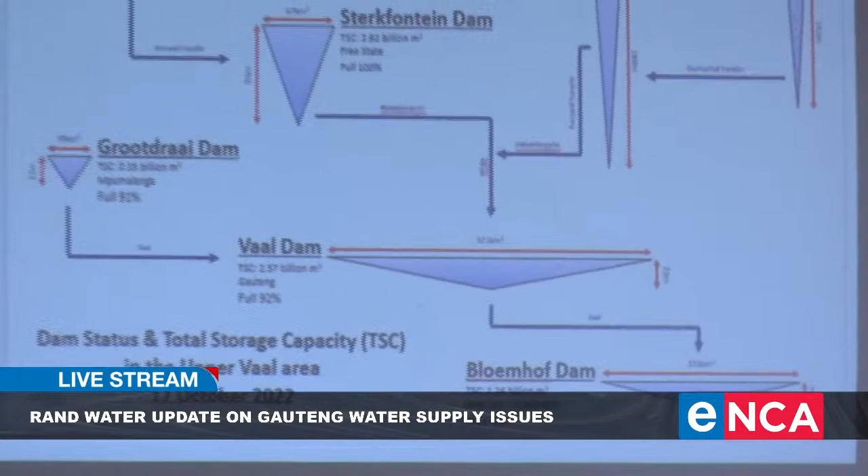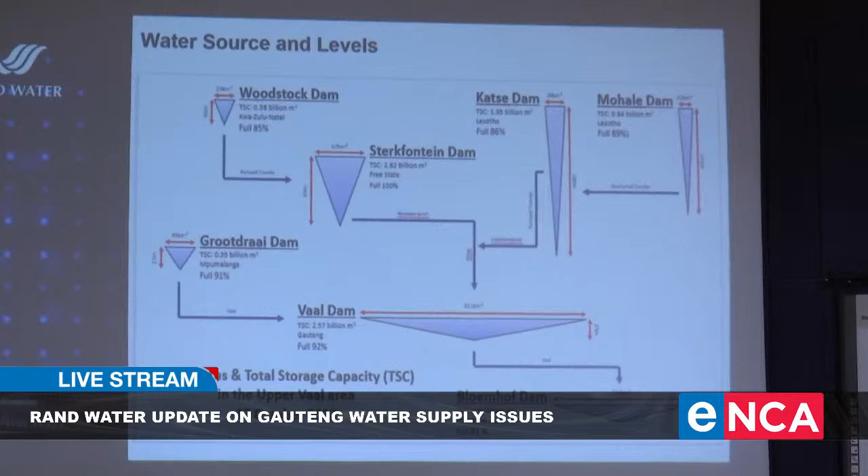Ladies and gentlemen, by and large, all the water that the people of Gauteng consume comes from Lesotho. South Africa does not have sufficient water resources, fresh water, within the country that is enough to maintain our water requirements now and in the future. So we need to bear that in mind - that the resources and water we use is water we catch, by and large, in the mountain catchments of Lesotho, and it comes down to South Africa. We don't have our own water.

Almost every single drop of water we pick comes from Lesotho. As a result of building these dams in Lesotho, there are plans to build more dams in Lesotho.

Needless to mention that as we build dams, we displace people. When we build dams in foreign countries, we destruct and destroy the environment - the fishes disappear. So it's really not ideal. I'd rather we use water sparingly than build more and more dams in a foreign country, because we are a water scarce country. So we must bear that in mind. But the water we consume here is the water that comes from the mountain hinterlands of Lesotho.

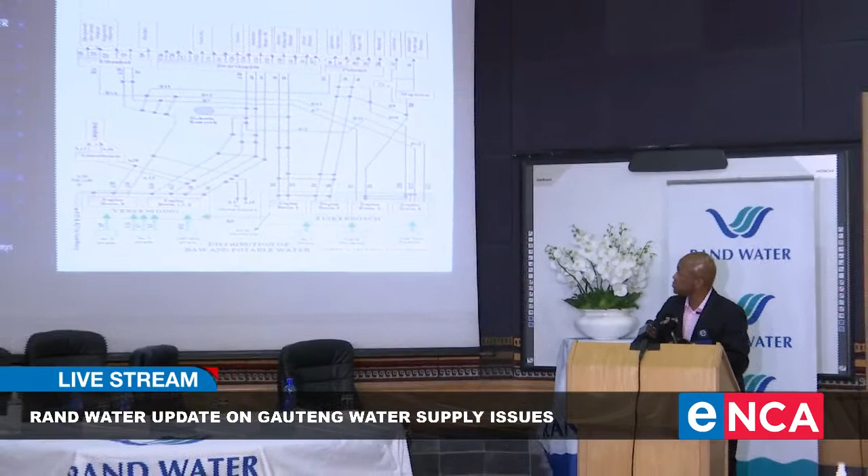This slide is intended to show our network and the connectivities of our pipe infrastructure. Our pipe network is over 3,056 kilometers that cuts across our area of operation. From the bottom, that's where the Vaal River is, and those two purification works are here. From here we pump to Eikenhof to the west, Mapleton to the east, and centrally Zwartkopjes and Palmiet, through a network of interconnected pipes.

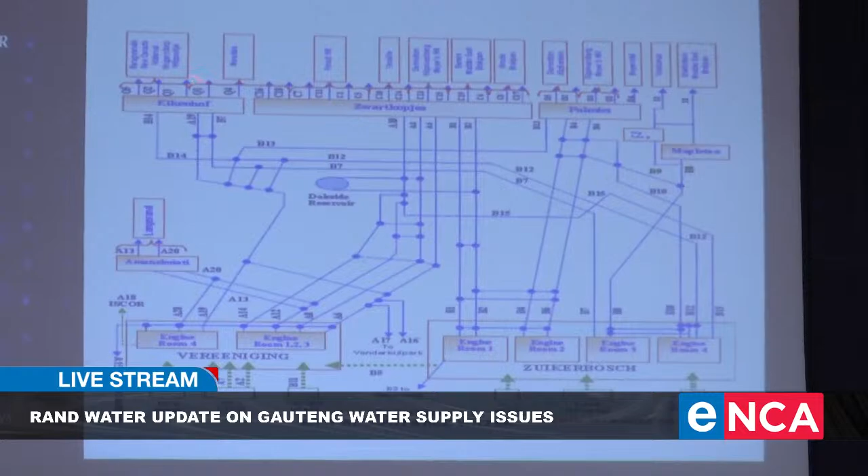This gives us flexibility to move water from one area to another. After that, we leave our water at bulk reservoirs, 58 that I talked about, up here. From here the municipalities draw water from our reservoirs into their reservoirs, into the households. We do not dictate how the municipalities must operate their system. The water we leave here, the municipalities draw from and reticulate. We do not determine which suburb must have water and which must not. It's the municipality's responsibility to work out the modalities of where water must come and how to manage it when it leaves our reservoirs.

So essentially our operations stop at this point, at the bulk level, not at the household level, not at the consumer level, not at the local distribution network level.

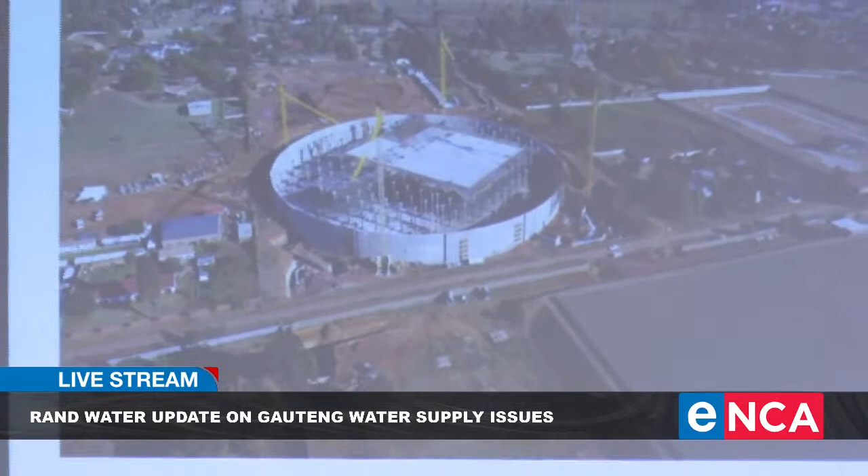Over and above what we are doing in terms of our infrastructure upgrade to augment the system, we are renewing our infrastructure through our renewal program. We are adding the Vlakfontein Reservoir that's going to give us additional storage capacity of 210 megaliters of water. So we are augmenting. We have a plan, and we have been having a plan.

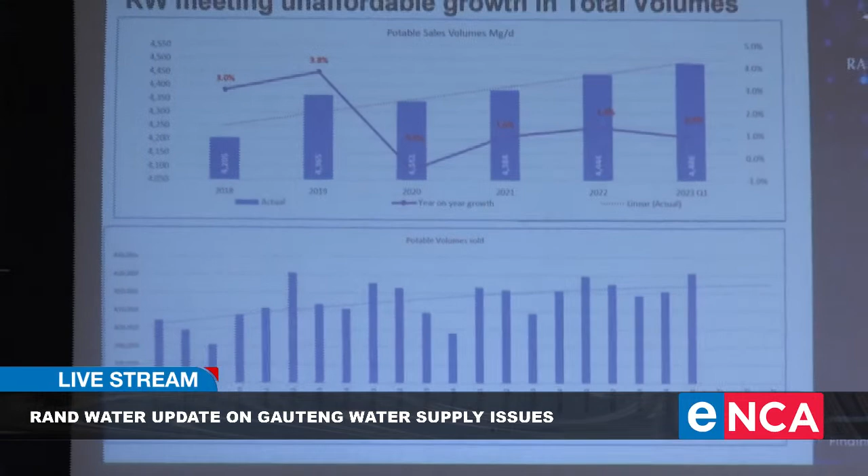Next slide, please. What we've done is drawn the same graph, taking volumes of water sold from quarter 1 in 2018 to quarter 3 in 2023. That graph actually shows that in relative and absolute terms, we are putting more water into the system. If you look at year-on-year growth over time, it shows an upward trajectory. So Rand Water is pushing more water into the system.

Next slide. In this one, I've asked the team to take the volumes from soon after winter, July, August and September, that we've been providing into the system. You can see from August 2022 to September 2022, there's a sharp rise in the water we're putting into the system relative to what we had budgeted for. We have been meeting this demand, we have been providing it, but what we're starting to see is the demand going that way, which from a resource point of view is not available, and from an affordability point of view, is not doable.

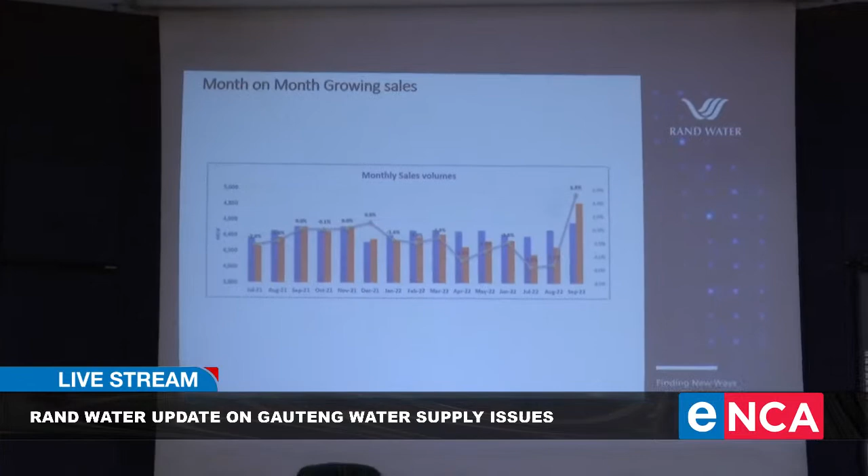We'll show in later slides that our municipalities, our people and our consumers are facing serious hardships in paying their water bills, and we're starting to see those numbers in our top line. So we are seeing that the more water we push into the system, the more we provide, our debtors days are going the wrong way. Our debtors days are now sitting at 80, whereas before summer they were sitting at 70.

So there's a request to put more water, and we're putting more water, but you'll see in the later slides our debtors days are going the wrong way. Many years ago, our debtors days were sitting at 30 days, but they're now sitting at 80 days. So there are economic hardships we are seeing in our numbers from the people that we are providing more and more water to.

That is why our view was that we need to look at different ways of managing the water that we have. We must share it sparingly, and be mindful that this resource is limited, especially as we have serious climate conditions as we speak.

So our view is, what needs to happen, what must we do? Our view is that we need to conserve what we have. This is a very busy slide, but I'll try to make it simple. We're currently abstracting about 1,680 million cubic meters of water per annum, which in layman's terms is 1,680 million thousand liters per annum.

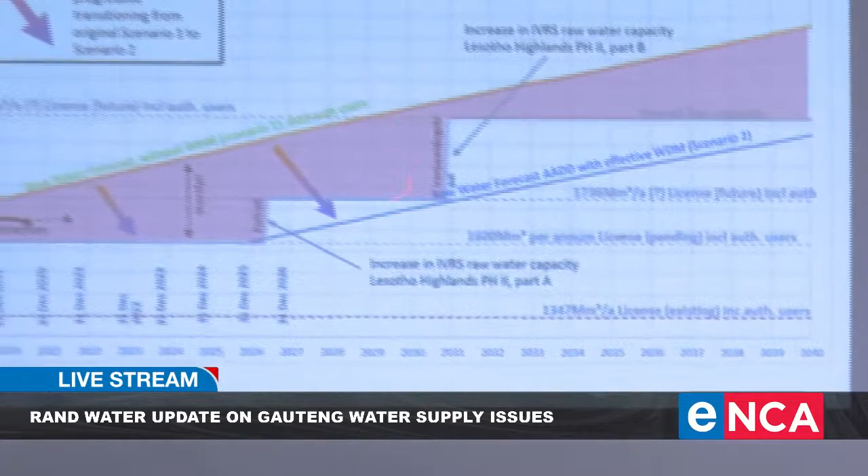If we don't conserve, we're going to have to build more dams, Polihali is coming, and we'll need additional infrastructure later on to make up for this demand that has wastage built into it. So we are not blaming our consumers, we can't do that, they are our customers. We are encouraging them, saying we think it will be a wise thing to use the water we have sparingly. Watch what we do with our water.

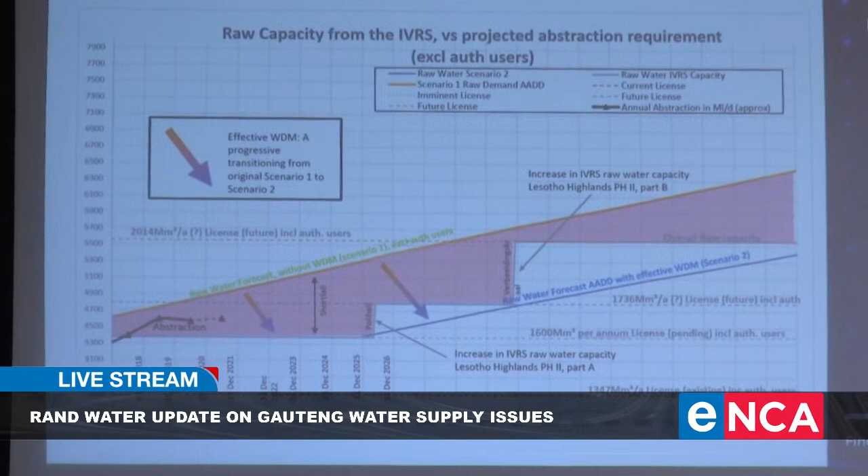As much as possible, refrain from using drinking water for non-drinking purposes, because in the long run, it's going to help us as consumers. We will not need this infrastructure. If consumption is high, we're going to have to build additional infrastructure, more dams. And when we build more dams, it comes out of our own water tariff - we will have to pay it. We cannot talk economic hardships and still demand that we build more dams, but we all know we are struggling with economic hardships in the country at this point in time.

The smart thing, the wise thing to do in all cities of the world, whether Los Angeles or Brisbane, that's what they do. They've adopted sound water conservation and demand management practices to deal with climate change, environmental impact, and affordability. Many countries have moved away from using drinking water to water their lawns. The commonly occurring lawn in South Africa is kikuyu grass - it's an invasive plant. The beautiful lawn we're watering our big yards with is alien invasive, and it consumes more water than indigenous lawns than that drinking water we should be drinking.

So when we talk about it's not raining, the water consumption going up has nothing to do with the dams. Because by and large, the people of Gauteng have automated sprinkler systems. They sense the humidity - if the humidity drops, the sprinkler systems go. And because you're watering kikuyu grass, the cycles run longer. If you run the cycles longer, you're emptying the reservoirs, and the low-lying areas in the municipalities consume more. You're dropping the levels, dropping the head in the reservoirs, so it doesn't pressurize water to reach high-lying areas.

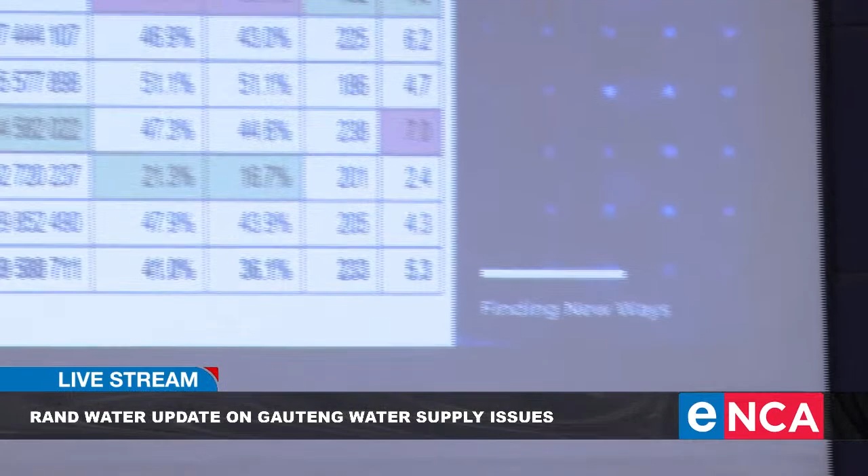What we have done - can you press it again? We have looked at research, independent from Rand Water, that compares our consumption as South Africa, as Gauteng, to the rest of the world. It's not that we don't have enough water, but the issue is, where does the water that we provide go to?

On average, South Africa consumes 233 liters per capita per day, compared to an average of 173 liters per capita per day - this includes developing and developed countries. In Gauteng, this research says we are using 305 liters per capita per day. This is the water that we pump in during peak demand season. So there is enough water that we're putting into the system to go around for everybody - the issue is how are we allocating it. What happens to that water when it gets to municipalities and suburbs that are consuming it? It must be shared, it must be evenly distributed, because the system is integrated and intertwined - we don't have a pipe that takes water directly to parts of a suburb. So our consumption in South Africa is still relatively high compared to other countries, precisely because we use drinking water for non-drinking purposes. Next slide, please.

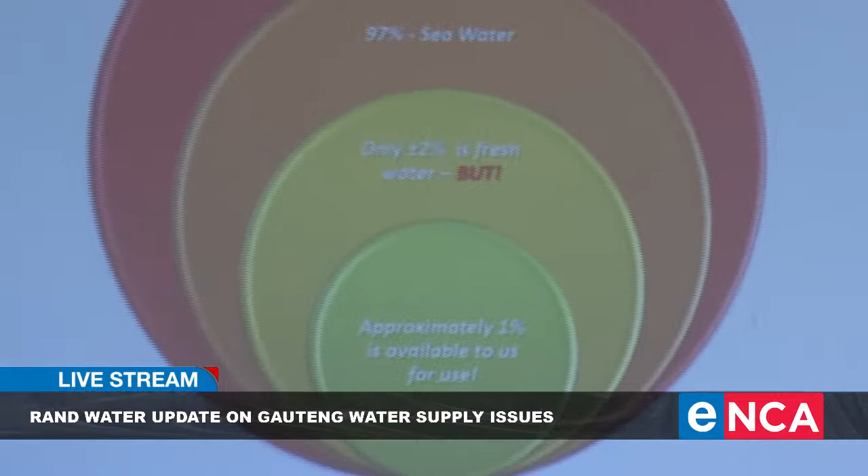When astronauts go into space, they look at the Earth and see just blue. The Earth is blue because it's covered by water. Over 70% of the Earth is covered by water. Unfortunately, about 97% of that water is seawater. It's not fresh water, not water you can quickly purify and drink. It's water that needs to be desalinated, high energy, high cost, with brine.

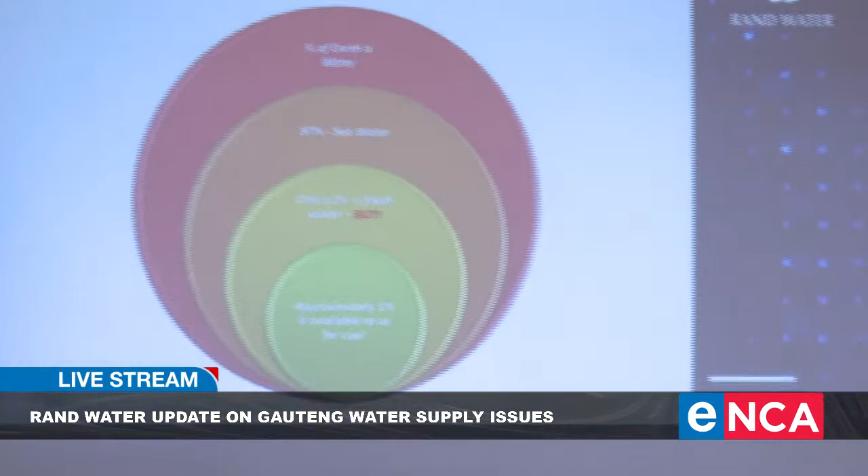There is a problem after this. 97% of the water is seawater, not fresh water. We are in the heartland of South Africa. We cannot at this point get water from the sea, treat it, and bring it here. We cannot afford it, it would be too expensive for the people of Gauteng. So most of the water on earth is seawater, not fresh water. Of the fresh water we have, only a small percentage is usable.

Of the 97%, you're left with about 3% that is fresh water. About 2% of that water is in the poles. We would love to move that water from the poles into here, but it's mission impossible. So we only have 1% of the water to go about for everyone on earth.

We have to use that water responsibly, because water operates in a water cycle. The Earth reuses water, it does not get new water into the planet every year. The water we drink and consume as fresh water is the same water that was consumed by dinosaurs millions and millions of years before humankind.

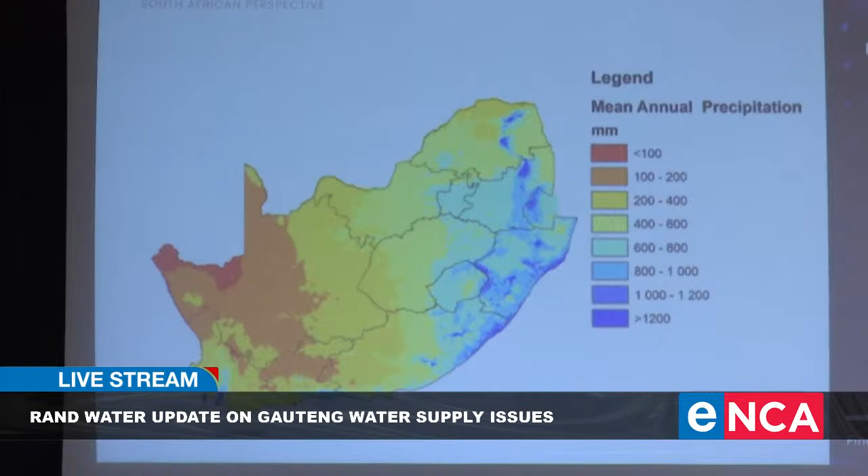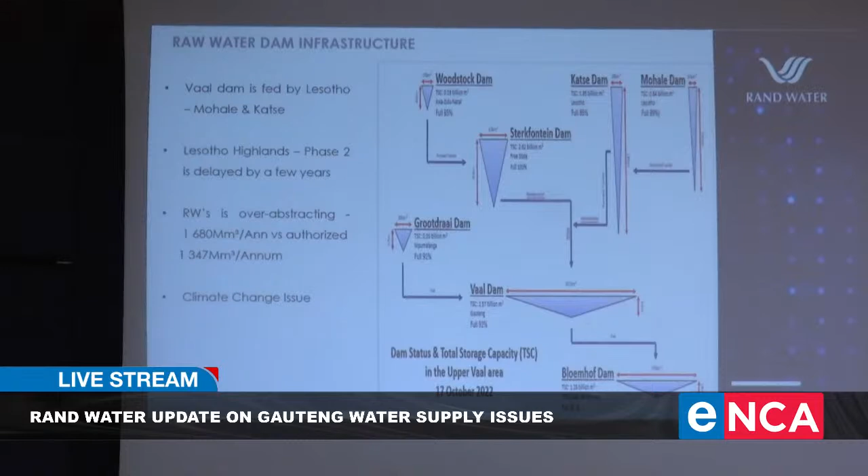In this slide, I'm trying to explain why when the dams are full, we're having problems. The dams are full, why is not everybody having water? We need to understand why the dams are built. The dams are not built for one season, they are built for seasons. The water we have now in the dams during this high rainfall season must last us.

Throughout the non-rainfall season, here in Gauteng is winter. If we have drought, like we are seeing now in the outer years, we have to use that water. So it does not mean when the dams are full you have to empty them. It means when the dams are full, you must use that water sparingly, in summer, in winter, and with the climate variability we see, you must also use it in summer.

It has not been raining that much, in fact at all, since the rainfall season. We are drawing on the water we have been storing in the last season. So the water that we have, ladies and gentlemen, is important - we have to understand that we have to use this water to last us during that cycle. This water must last us.

Should we have drought in the next drought season? So dams are built to store water, not for a season, but for seasons. Dams are built to store water, not for a heat wave, but for anticipated drought conditions that may arise.

So we have water in the reservoir - they're not in the reservoirs, we don't have water in the reservoirs, we have water in the dams. We have water in the dams, but that water must be used over a period of time.

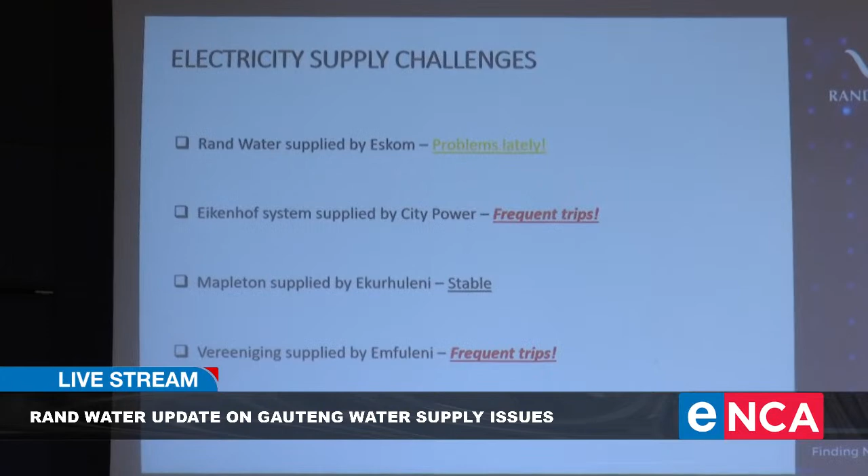As I'm about to finish, I just thought we should talk numbers to say - all this increase in volumes that we have met, what impact has it had on our numbers, our financials as at today. What we have seen, starting with debtors days, as I indicated, we're sitting at 77. We're pushing more water into the system, but our debtors days are going the wrong way. When I started in this water sector about 10, 15 years ago, our debtors days were sitting at 35 days.

Our debtors days are sitting at 80 days. We have serious economic hardship suffered by our municipalities, a function of the tough economic conditions our people are experiencing. So we are pushing more water, but our debtors days are going the wrong way. Our debtors book as we speak is sitting at about 5.2, just under 5.3 billion, and our accounts overdue outside the current account is 3.3 billion.

So our total net trade receivable is about 3.1 billion. We are providing for what we call expected credit loss. In terms of accounting standards, they dictate that we must provide for that cost in our income statement, and therefore it does affect our bottom line. If it affects our bottom line, we don't have enough surplus to upgrade, refurbish, operate, and maintain. So although we've seen an increase in volume of water, we are seeing our debtors days going the wrong way.

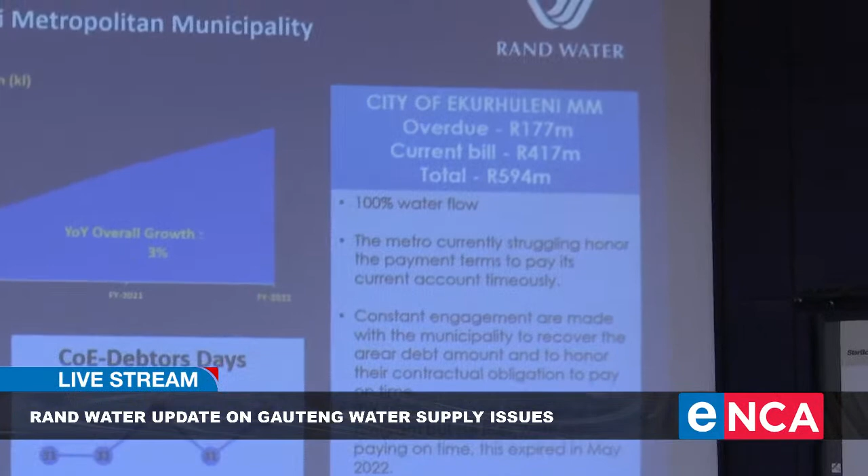So we're receiving our payment in time, but you'll see in other municipalities, starting with Ekurhuleni, we are seeing that our debtors days for a number of years has been around 30 days, but we are seeing that hardship coming through in the city of Ekurhuleni. Debtors days going to 59.

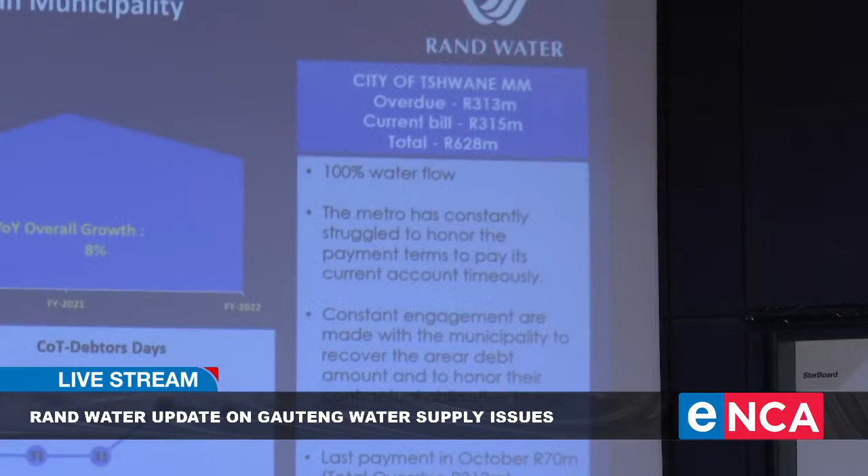We'll go to Tshwane, go back, Douglas. So what we are saying here, we are seeing, you've gone forward. Yeah, go back. You must be coming from Tshwane. You don't want to see the numbers from Tshwane.

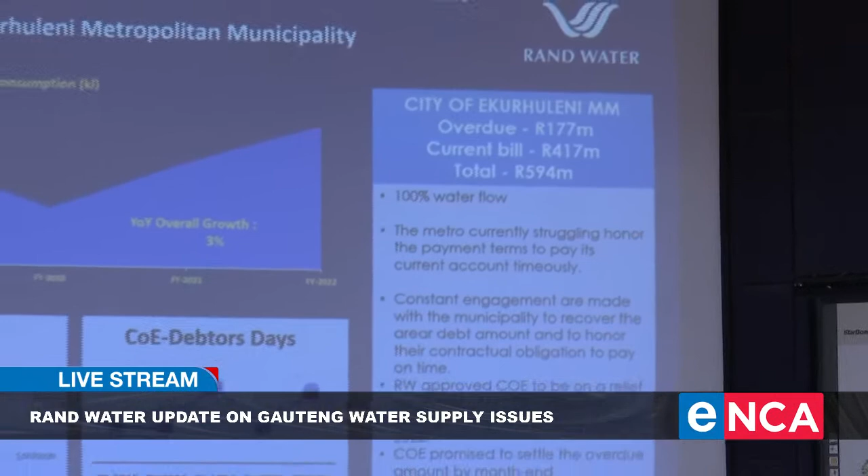So city of Ekurhuleni, we are seeing economic hardship with our second biggest customer. We are pushing more water into the system, but that is not commensurate with our revenue, not commensurate with the money that comes back. So we are meeting peak demands, pushing more water, but we are creating a different problem. I don't know if we're trading recklessly, but we are giving water, and we're not getting paid. We're meeting the demands, but seeing that there are hardships. That is why our clarion call is to use what we have sparingly, to what we can afford, to keep us going.

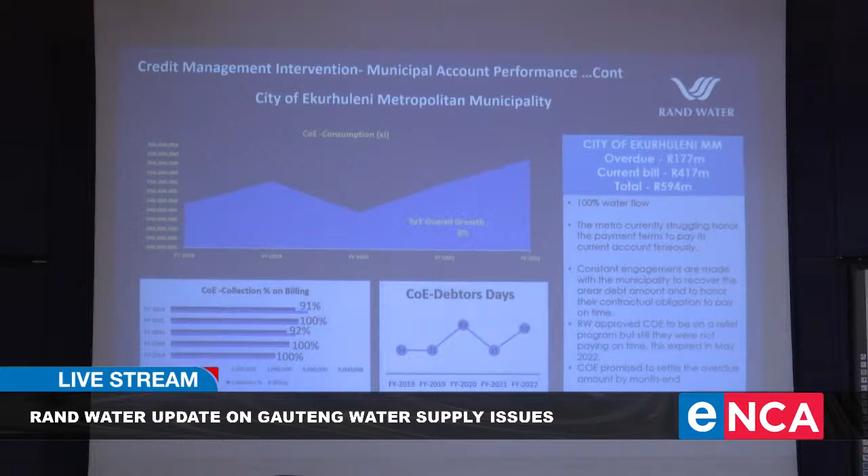There is no point giving drinking water to water my lawn, and then I struggle to pay for that bill, or my municipality struggles to pay that bill. So it's not shifting the blame. It's saying, look at what you consume, look at your economic hardships, look at the challenges in the municipality, and let's work on changing our behavior.

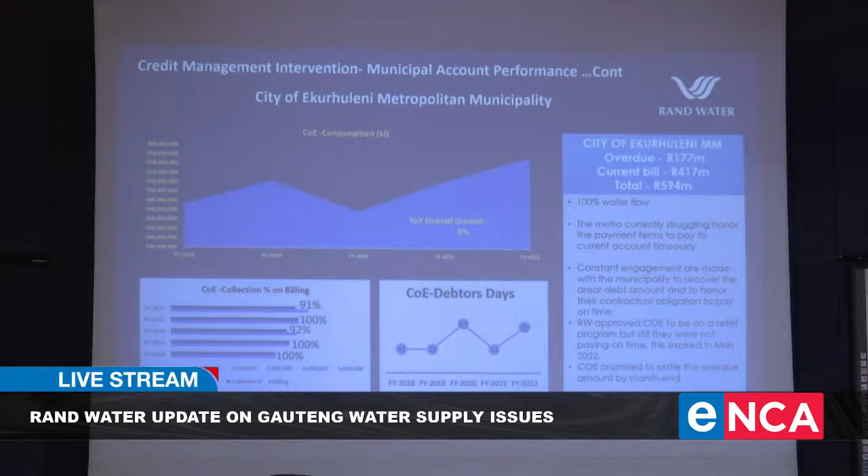So debtors days for City of Ekurhuleni has gone the wrong way, but we're very happy 2021 it closed at 21. But you can see this pattern that our municipalities are also starting to feel the economic hardship pinch. Next slide. In Tshwane, we are seeing the same pattern.

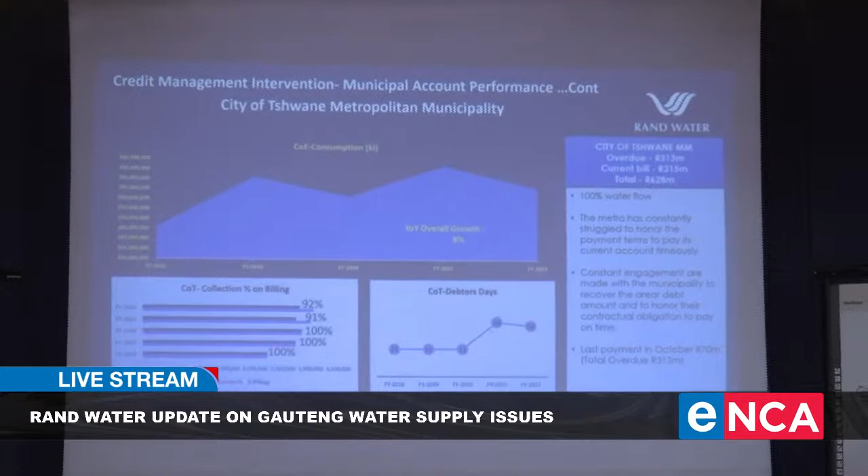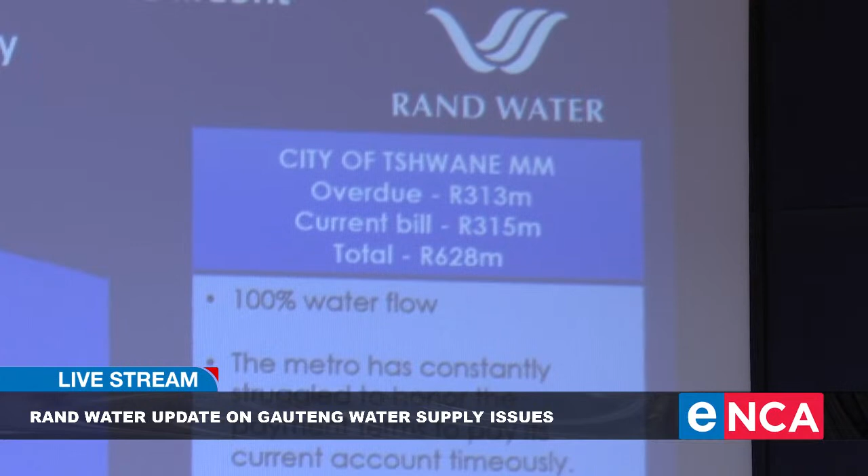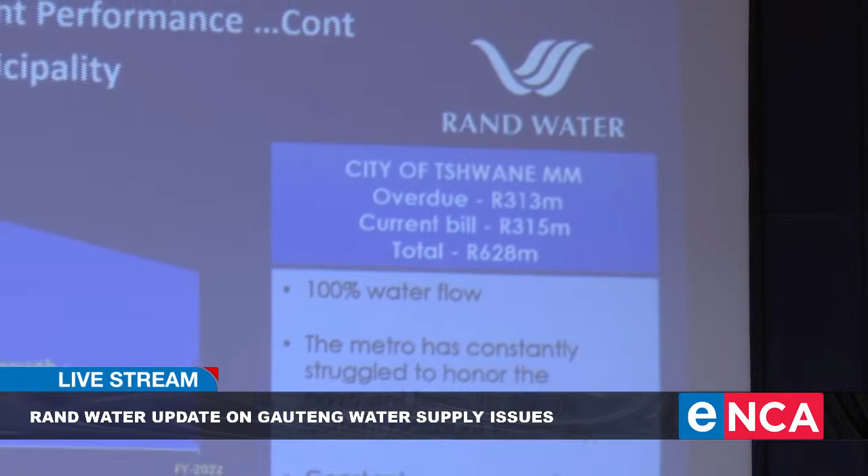Tshwane in recent times has been struggling to pay the accounts on time. We have been very lucky for a number of years. Tshwane has been coming at around 31 days, but you are seeing that the more we put, the more we have issues of debtors days. So that is why our view is that instead of demanding more water, because you are having financial difficulties in terms of paying your debtor's bill on time, use what you have sparingly.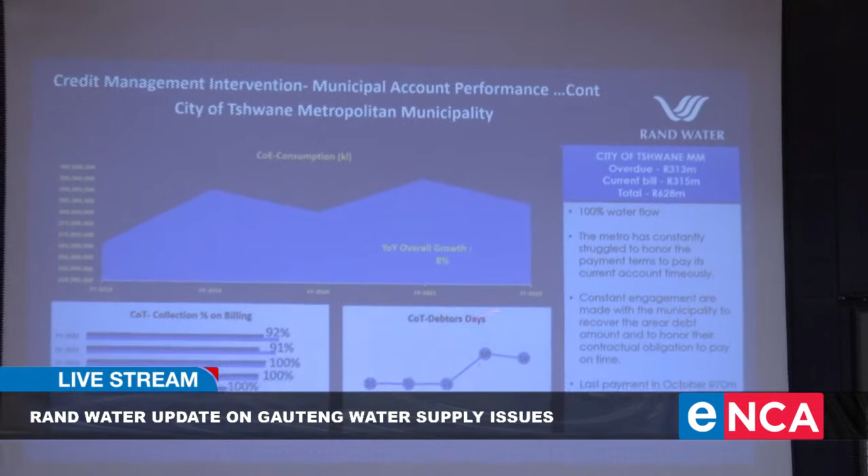Watch very closely and guard jealously the drinking water that goes into the municipalities. So in essence, apart from Joburg City, we're starting to see the second, the third, in fact the fourth biggest customer, eMfuleni, next slide, is having a lot more hardship. The second, the third, and the fourth are having serious challenges.

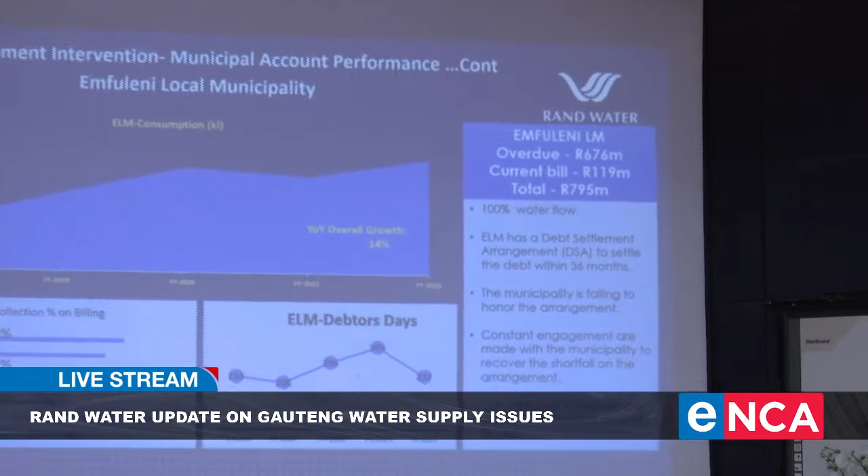10, 15 years ago, debtors days of eMfuleni, our fourth biggest customer, was 31 days. It's sitting at 237 days, coming from a record high of 365 days. So again, it is important to understand that the more we push, the bigger the bill, and therefore the hardships that come with paying that bill. Next slide, please.

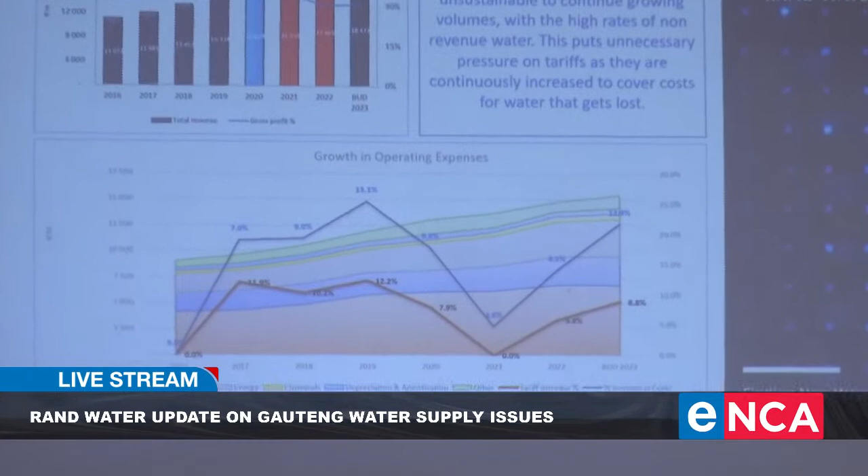What we are seeing is that all these hardships and late payments have had an impact on our declining and eroded gross profit margin. As our operating costs grow, our tariff is growing at about 8%, while our total operating costs are growing at about 12%. There's a big gap there. So if you have debtors days going the wrong way, and a tariff lower than total costs, it means serious challenges going forward. In the foreseeable future, it will create a challenge for us to provide more and more water.

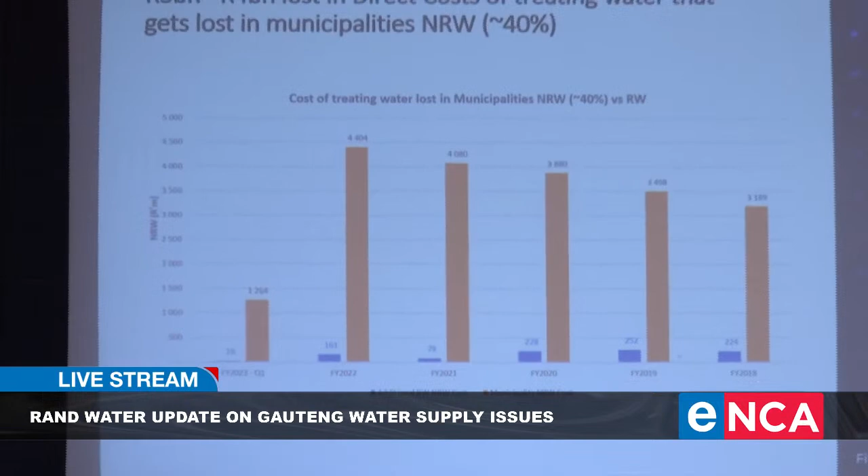In this slide we're giving the numbers you may know, that we estimate the non-revenue water in the municipal space is about 40%, between 3 and 4 billion. So we are working long and hard. We have to assist and work with our municipalities to bring the non-revenue water down. Our non-revenue is about 7%, which is within the world standard. By non-revenue, we're talking water losses. Municipal non-revenue water losses are in the region of 30 to 40%, as the Water Research Commission indicated in one of their recent studies.

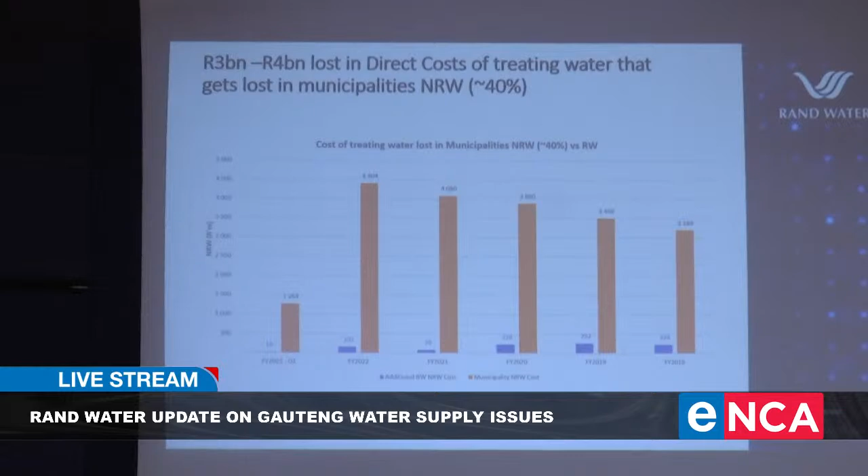In conclusion, we are saying Rand Water has year on year produced more water than budgeted by its customers, and we have shown that in the numbers. This is underpinned by a very robust infrastructure life cycle asset strategy that ensures we meet the demands and plan for the infrastructure. We have planned for infrastructure, we are planning for the infrastructure. That is why we are able to supply high demand. The increase in water requirements is made up of high non-revenue water and non-drinking water requirements that we are seeing in this period. The current high water requirements are not sustainable going forward for us as Rand Water as an institution.

High non-revenue water by municipalities must be sufficiently budgeted for. We must tackle that head on. Water usage for non-drinking purposes, particularly during high peak demand, must really effectively be stopped. The high water utilization is not affordable by consumers in municipalities given the current economic situation we're seeing in South Africa.

So I'll pause here, ladies and gentlemen. The long and short of the brief is that we have been pushing more water. We have not reduced water, we have not shed water. We are requesting and imposing curtailments because there is more and more and more, over and above the peak that we have been able to budget for. Thank you so much.